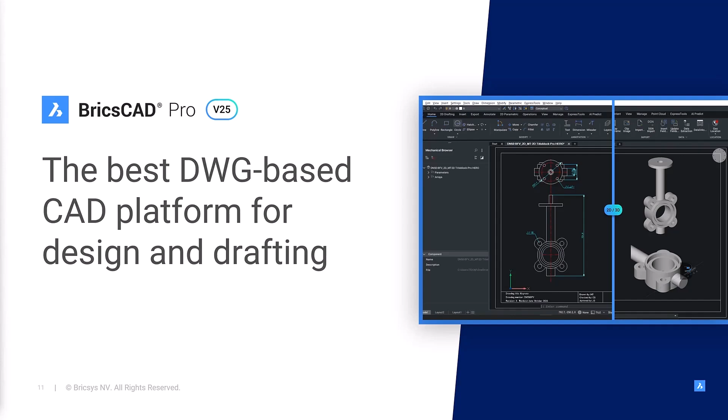We can say that BricsCAD V25 is the best DWG-based CAD platform for design and drafting. To prove this to you, we'll show you how we've enhanced your most common CAD workflows.

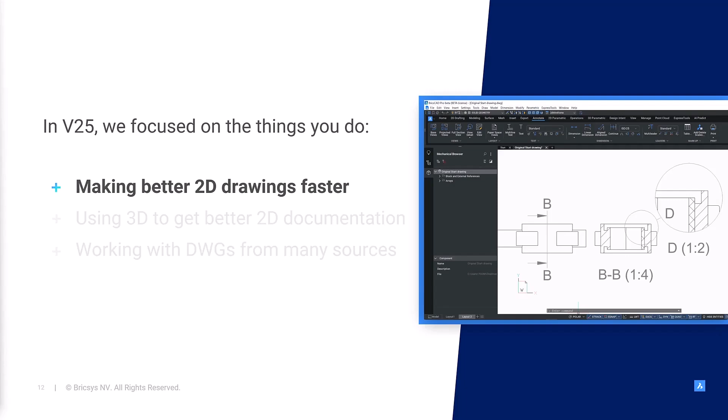First, we'll show you how BricsCAD helps drafters create better 2D drawings faster. Then, we'll show you how you can use 3D to get better 2D documentation and make the drawing look exactly like the part easily.

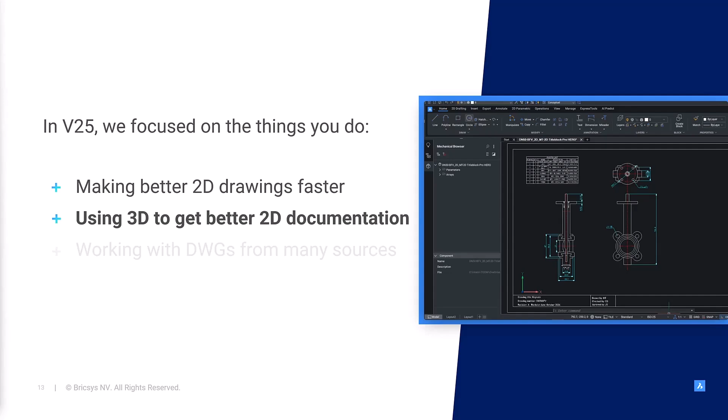Finally, we'll show you how BricsCAD helps you work better with drawings that come from outside sources.

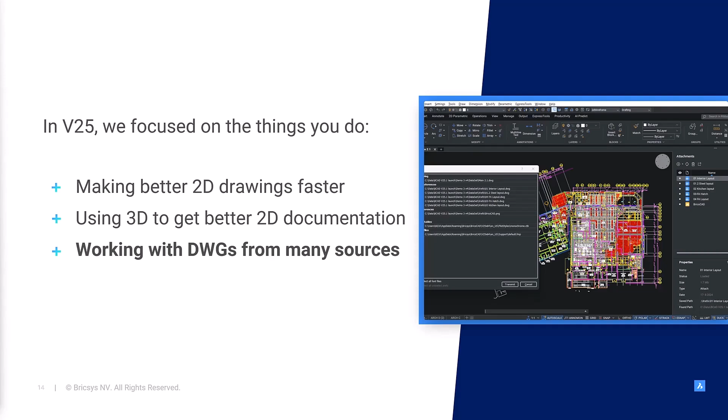First, we know that nearly 80% of our users do 2D drafting every day. We know this because whether you're building a building, producing a part, or putting together a complex assembly, a 2D drawing tells you how to do it.

So we focus on improving the tools you use to create accurate 2D geometry and annotations to get drawings created and published faster.

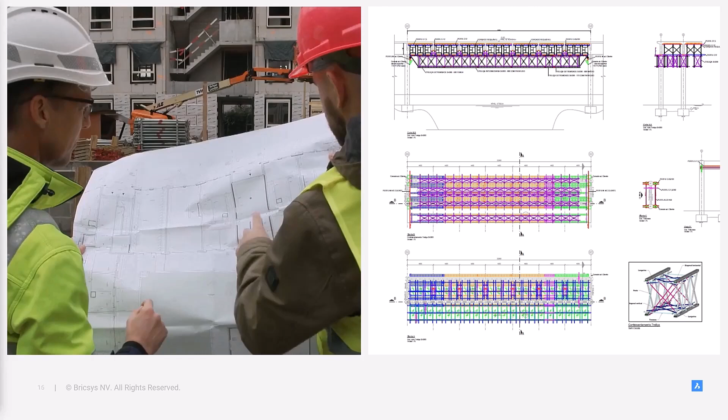In BricsCAD V25, we enhanced several commands and added some new ones to accelerate 2D drawing and document creation.

We improved a series of core commands to help you create and modify 2D geometry faster and more intuitively. Enhancements to trim, hatch, mirror, and scale, some of the most used commands in BricsCAD, will help you speed the creation of 2D geometry.

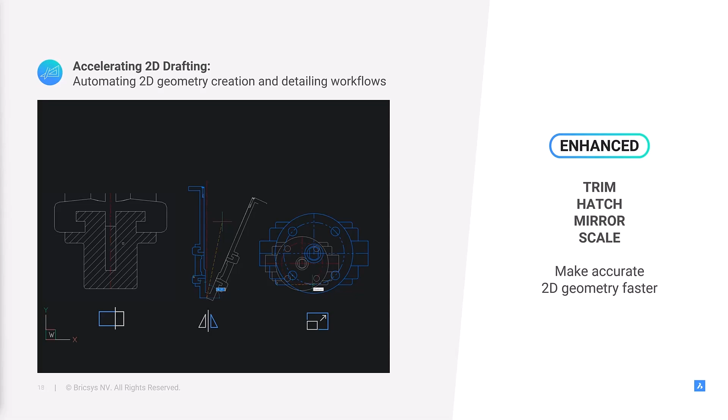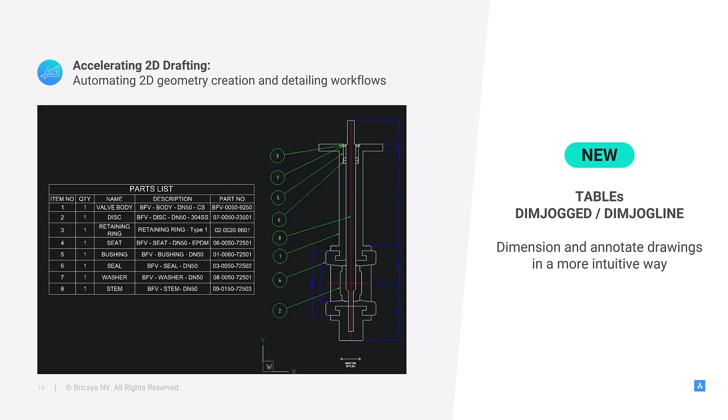In V25, we've added new functionality around table creation and editing, and added a much requested dimension type. Here's Mark Tooley, our Technical Marketing Manager for BricsCAD, to show you how these new features can help you work smarter. Mark, it's all yours.

Thanks, Don. In this demo, we'll focus on a series of core commands to help you create and modify 2D geometry faster and more intuitively.

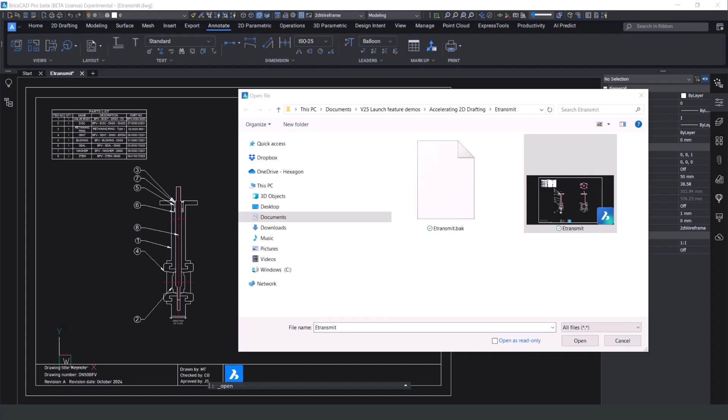You'll notice straight away in the File Open dialog box familiarity to every other Windows application, with the ability to search and pin commonly used file locations for quick access to your documents.

To demonstrate the enhanced features, we're going to use a cross-section of a butterfly valve with some pre-drawn geometry.

The trim operations have been vastly improved, and they work in an easy-to-predict way, offering productivity gains for fast geometry trimming with better boundary detection. This gives you, the CAD user, much more accuracy when trimming across multiple boundaries.

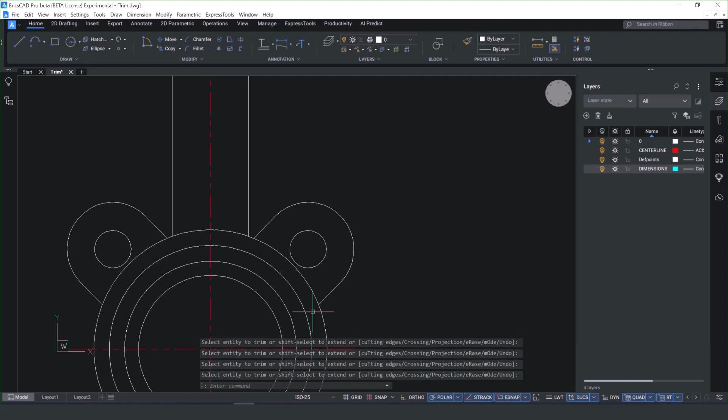Trim enhancements have also been added to when working across hatch regions, making it very quick to pick up closed boundaries, which enables really fast 2D edits.

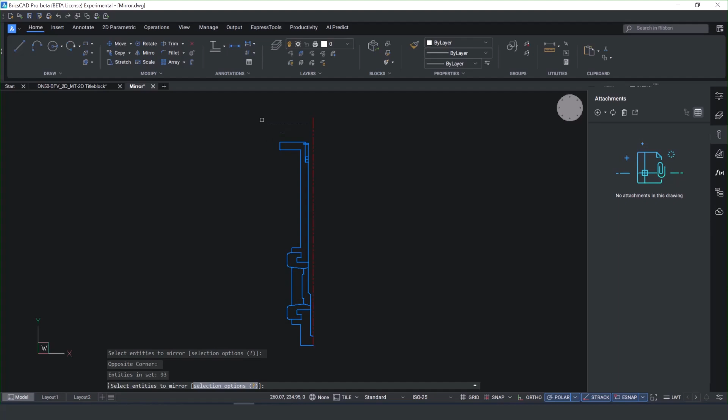The mirror tool now retains the temporary tracker graphics that makes the command much more predictable and more intuitive. This is great and offers parity for those that have migrated from another 2D CAD platform.

Improvements have been made to the scale command, making it much more controllable for the user. The preview window is visually more predictable when scaling entities visually inside the modelling environment.

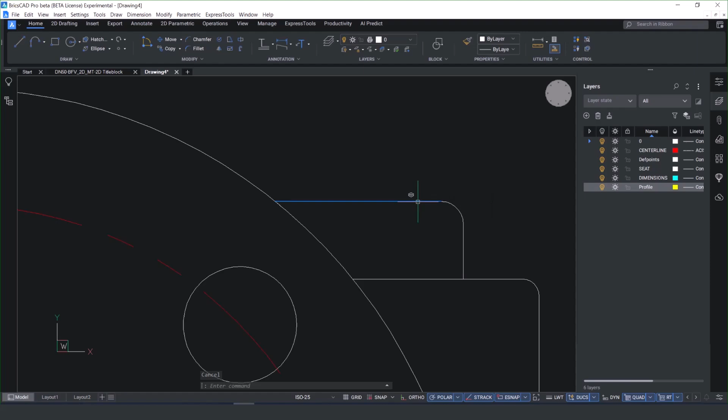Drawing fidelity has been addressed when working with imported data with overlapping entities. Selection cycling has been added to identify overlapping geometry quickly with imported data, and you've got the option to reassign the geometry to another layer or delete it.

As part of our continuous improvement, we're now going to look at the first of our annotation tools that have been enhanced. We've made some additions to the table command, but also new dimensioning tools for jogged dimensions and jogline dimensions, and we're going to use this standard slotted channel as our example.

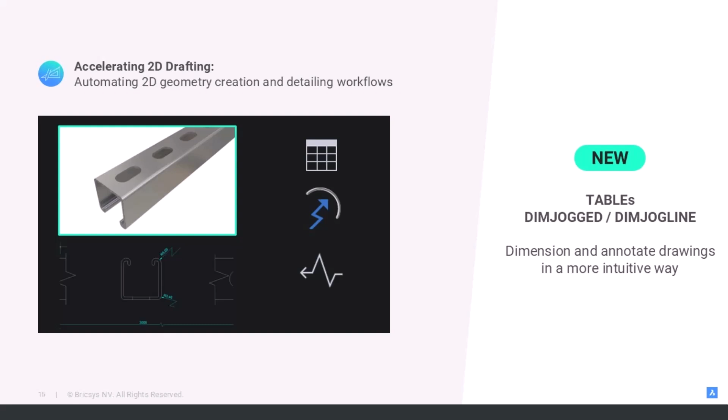The table functionality within BricsCAD has been vastly improved. You've now got the option to sequentially copy and paste data from one cell to another, making it really quick to duplicate data. You can just copy and paste from one cell to another as well.

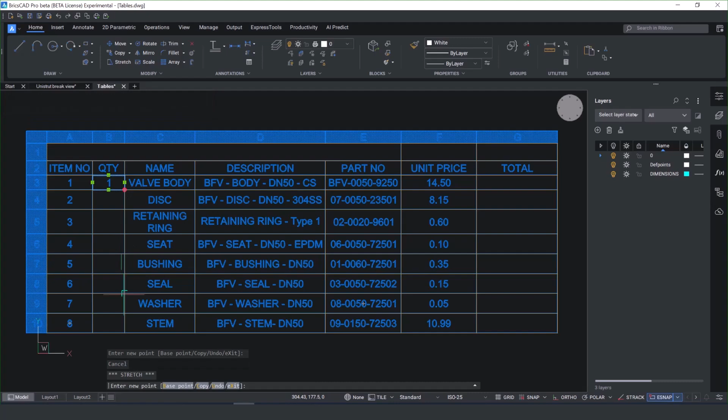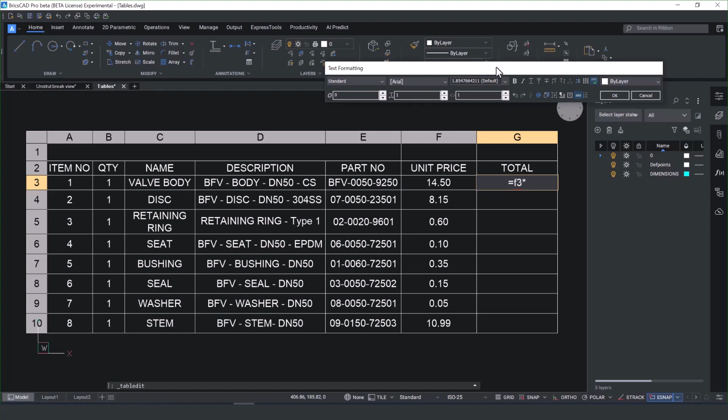The table-based functionality improvements don't stop there. You've also got the ability of copying formulas from one cell to another, making it really quick to total up values. For parity to other 2D CAD platforms and speed up your drafting practice, we've added 2 new dimension types directly from customer requests.

First of all is the jogged dimension that allows you to put a jogged leader line on a radial value.

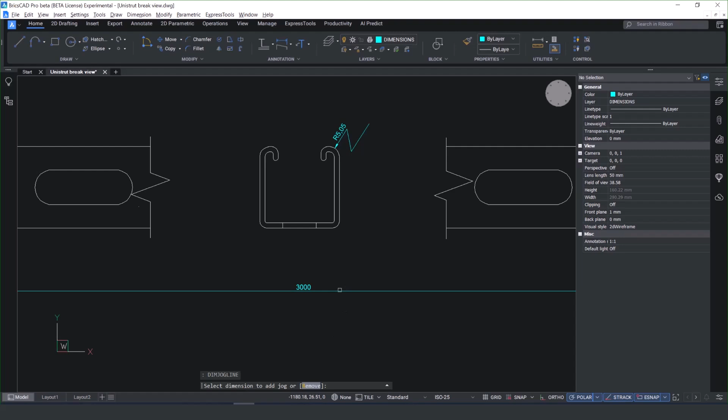You'll notice here I've got a cross-section of a standard slotted channel, and I've also got the option of adding a broken leader line on the dimension, making it a lot easier and quicker to detail the drawing.

BricsCAD is customer-driven CAD, and we know that about 15% of our users use 3D modeling frequently. What do these users know that 2D only users don't?

They have learned that 2D and 3D workflows come together seamlessly in BricsCAD Pro. They have also learned that even basic 3D modeling can help to make the drawing look exactly like the finished part easily. Why is this so important?

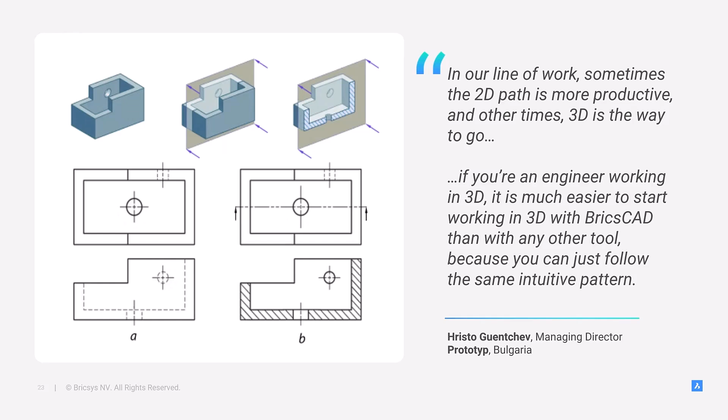It's important because an accurate representation of the design helps ensure that it will be built or manufactured correctly the first time. When 2D line work is automatically generated from a 3D model, section views can improve visualization of the design, reveal interior features of parts, and facilitate dimensioning of the drawing.

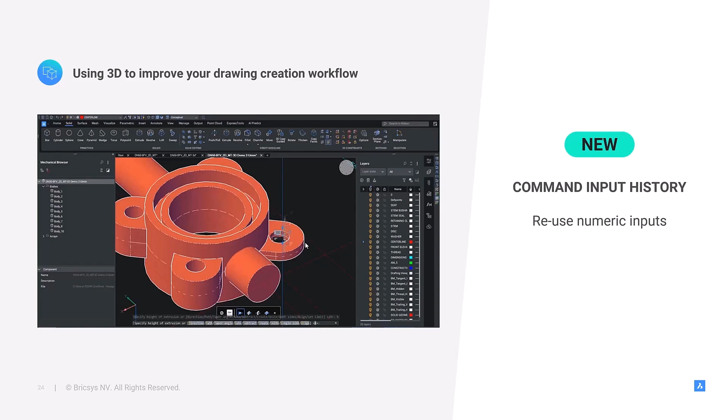To make it simple to take what you know about 2D and turn it into 3D, we've added a series of new and improved commands to BricsCAD V25. Command input history lets you type a value once and use it many times. And we've improved the performance of our core modeling engine to make the creation of 3D features faster.

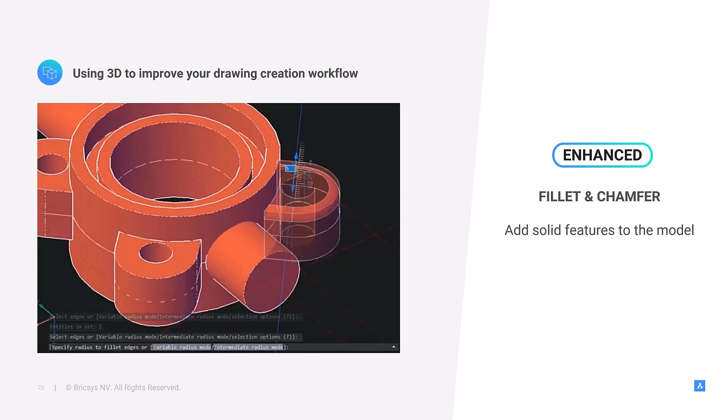We've enhanced the ViewBase command in BricsCAD V25, moving view generation to the background to let users continue to work while views are generated. And if your workflow includes the creation of 2D drawing views in model space, the flat-shot command runs up to 16 times faster than it did in previous versions of BricsCAD.

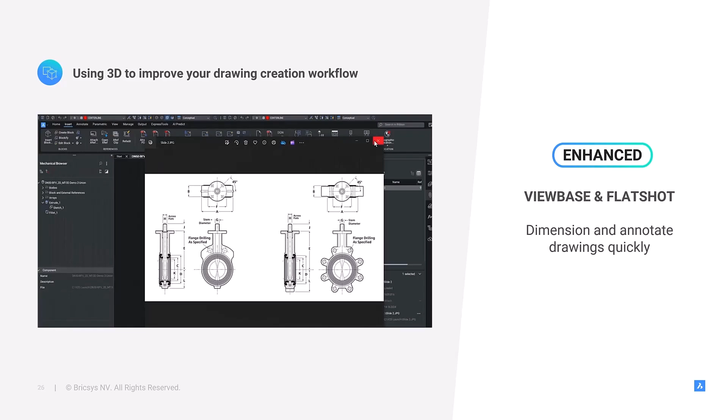Mark, please take us through BricsCAD's 2D to 3D to 2D workflow. Thanks, Don. In this demo, we will be focusing on a series of core 3D modeling commands within BricsCAD. This workflow combines the use of existing 2D profiles to create accurate 3D component representations.

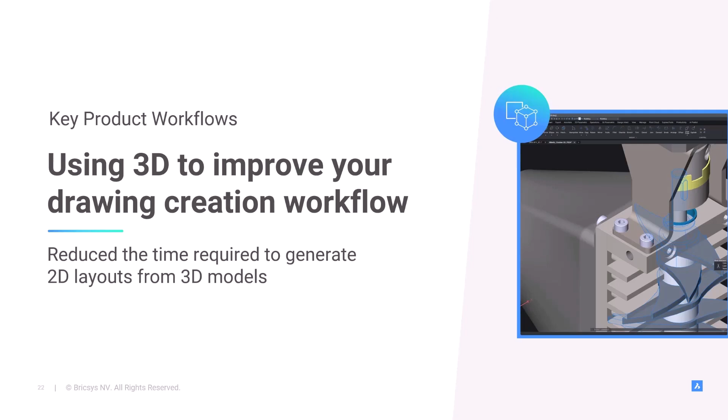Right, you guys have done the hard work in 2D. Let's look at how we can use the 3D capabilities of BricsCAD Pro to create better 2D documentation, whether it's an imported DWG file from a third party or created with native BricsCAD data.

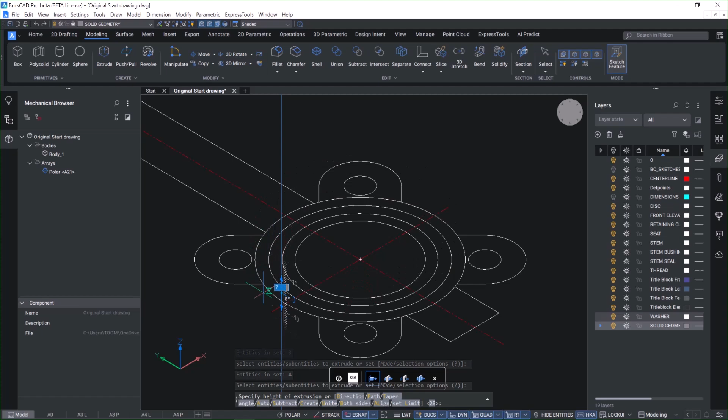Creating 3D geometry is fast. Using the enhanced quad shortcuts, you can access the 3D commands really quickly. And you'll notice by having boundary selection highlighted, we can pick closed regions to extrude into solid features. You've also got various end conditions when you're in the command.

You can set B to allow you to extrude the data both sides of the midplane, and you can also taper the value as well. So it's really quick to lay down 3D geometry in the modeling space.

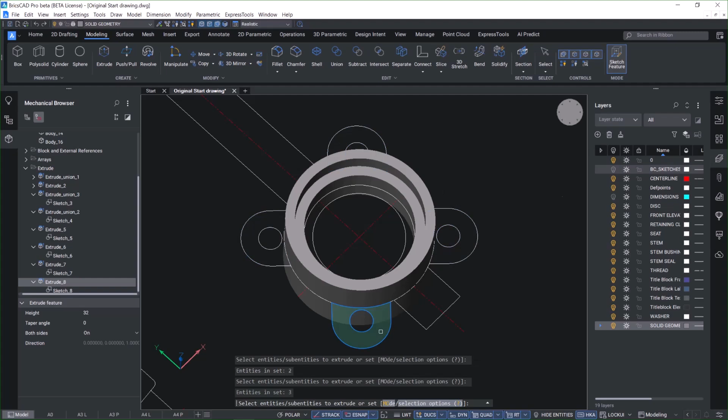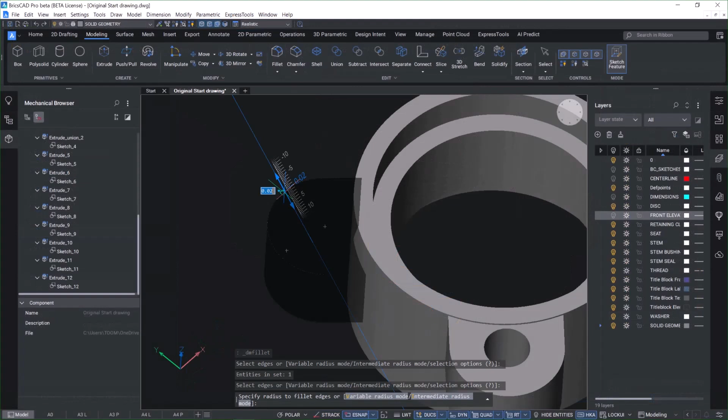To work smarter, in V25, you can use multiple closed regions to create a single feature. You'll notice here these 4 tabs have been created in a single command. But the great thing is you get downstream benefits because they're all seen as individual bodies, which can be manipulated independently. You'll notice in the browser I can change the value, and then I can also add fillets and chamfers at a later date. And when you change the value on screen, it instantly updates to give you a preview of what's happening.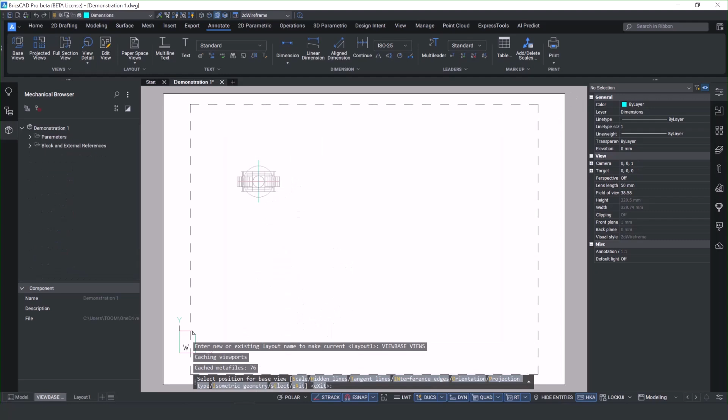You might hear us say the fastest way to 2D is 3D. So now we've got this solid model, we can use the newly enhanced VIEWBASE command, which works in the background to generate the views. And the cool thing is with this, in the 2D environment, you can create projected views really quickly. The downstream benefit is once you've got the drawing views in the 2D space, we can actually start looking at interrogating the model in a lot more detail to learn more about the design intent.

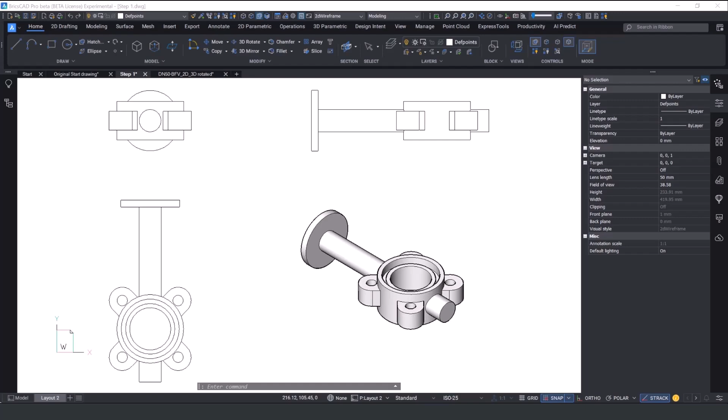Under the Annotate tab, we've got multiple options for view creation, such as sectional views, where we can actually take a cutaway through the model, and it just makes it so much easier to see and visualize any hidden detail. We can change the scale of the view, and we've also got circular and square detail views that we can create to really interrogate model details.

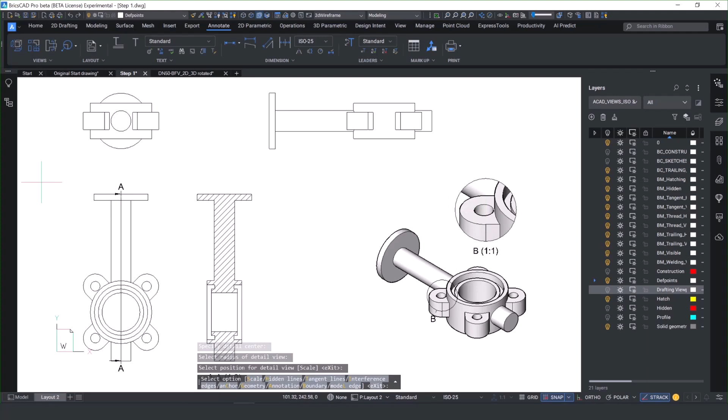The performance of the flatshot command has been vastly improved in V25. Within the model space, you can create 2D projections that can be saved as a block within the existing document or exported out as a separate file.

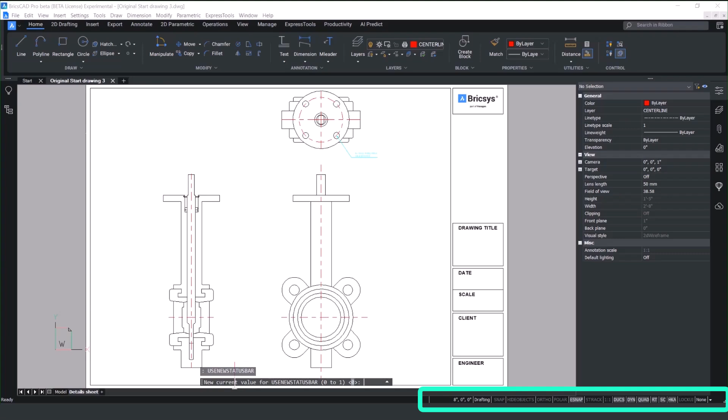We appreciate you're still going to be working within the viewports, and that's why we've enhanced the status bar. To use the new status bar, simply run USENEWSTATUSBAR on the command prompt and set the value from 0 to 1. Once you've restarted BricsCAD, you're good to go. This makes it really quick to change the viewport scale rather than having to go into the viewport properties.

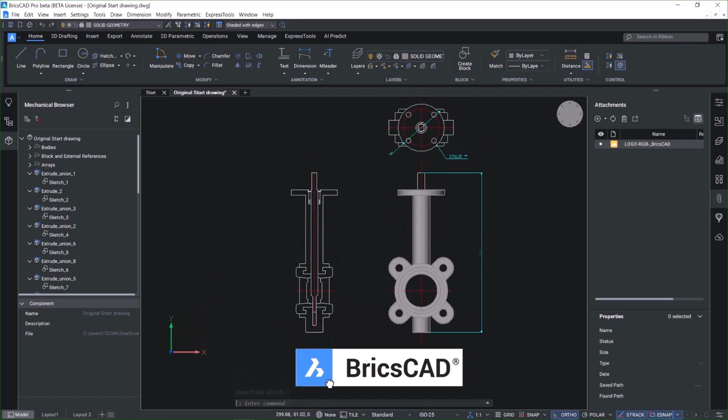When working with external references, it's really frustrating if the file path gets changed, meaning that the file can't be located. In BricsCAD V25, we've improved this, enabling you to run an extended search to find any of the missing items really quickly.

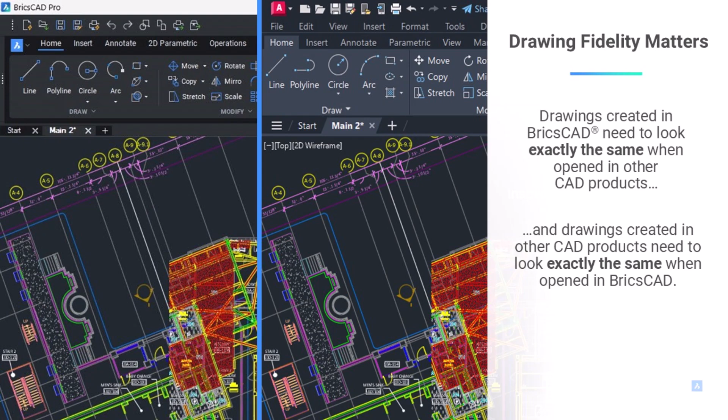Because BricsCAD is customer-driven CAD, we know that 100% of our customers work with DWG files from multiple sources, and that these files are created by multiple CAD products. Our customers tell us that drawing fidelity matters. BricsCAD displays the highest fidelity with the drawing file standard, regardless of where those files come from. And in BricsCAD V25, we've delivered updated tools that make it easy to ensure that both incoming and outgoing drawing files are optimized and highly performant.

Our customers tell us that drawing fidelity matters, so we've made drawing fidelity job one. BricsCAD V25 delivers new, smart tools that make it easy for users to ensure incoming drawing file completeness and integrity.

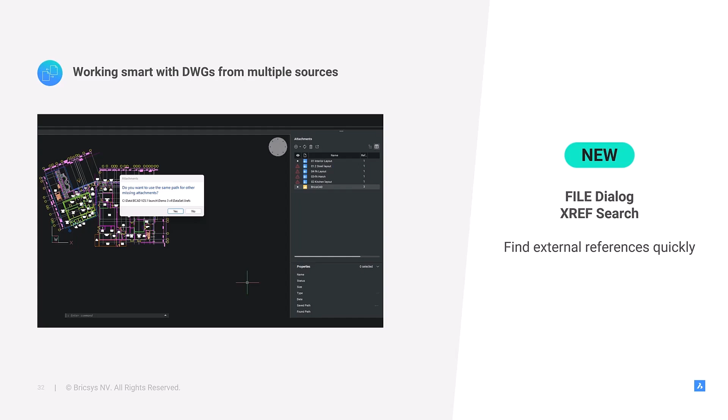A new file dialog and enhanced XREF search help ensure easy access and drawing completeness. And we've updated BricsCAD's unique drawing health workflow in V25 to help you automatically inspect and improve the performance of incoming drawings. The demo will show you how important drawing health is to the performance of your CAD product and the accuracy of the drawings that you create.

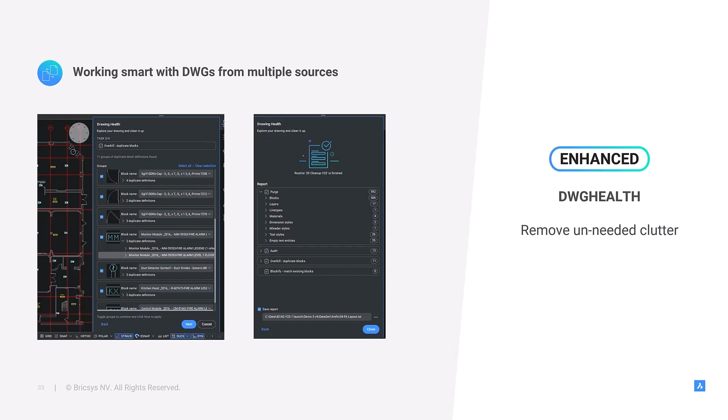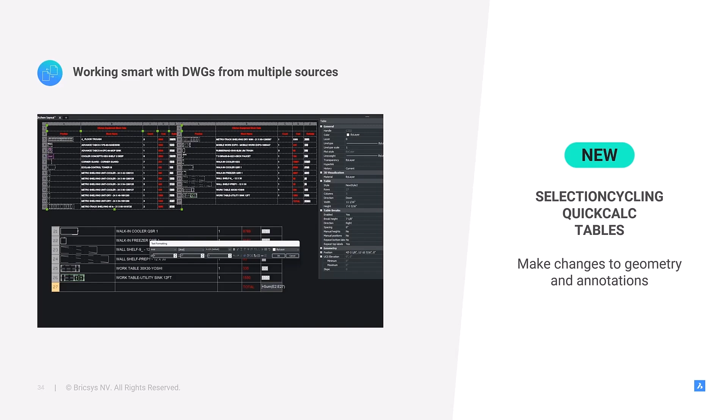We'll also show you some of the most requested enhancements to BricsCAD's drawing editing capabilities, like selection cycling, enhancements to Quick Calc, and the new table creation and editing functionality. And finally, we'll demonstrate BricsCAD's powerful sheet set management and publishing workflows.

Our North American Presales Technical Manager, Julie Kavarian, will show us what's new in BricsCAD V25 to help you work smart with drawings from everywhere and anywhere. Julie, take it away.

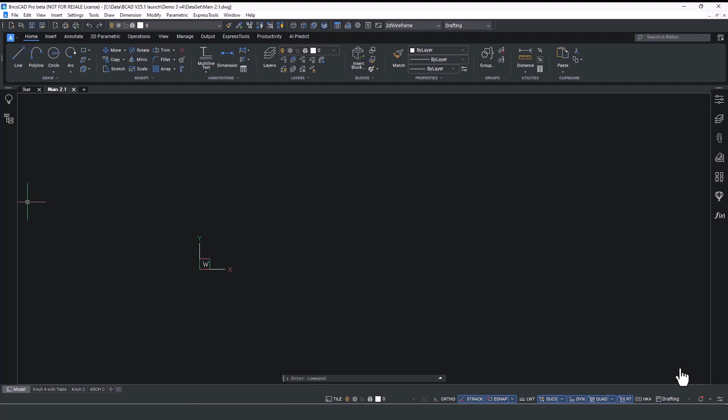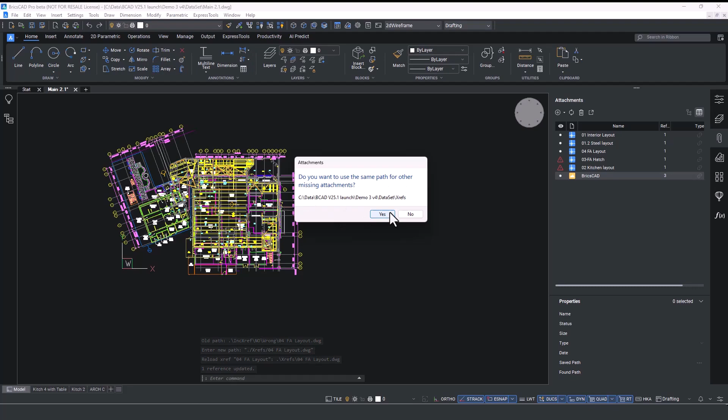Thank you, Don. Is there anything more annoying than opening a drawing and seeing that dreaded missing files pop-up window and those red triangles that mean the XREFs aren't found? BricsCAD V25 delivers enhanced XREF searching for those wayward paths. Let BricsCAD try to find the correct path by running an extended search, or locate a drawing and let BricsCAD apply that same path for the other missing attachments.

When receiving drawings from external sources, we never quite know what to expect. Here is a small fire alarm layout drawing. Right away, we can see that those fire alarm symbols are no longer blocks. So I wonder what else needs to be fixed, and how do I know what needs to be fixed in a drawing that I'm not familiar with?

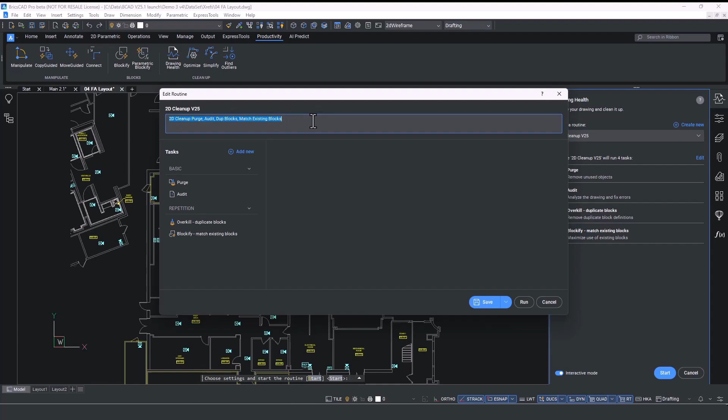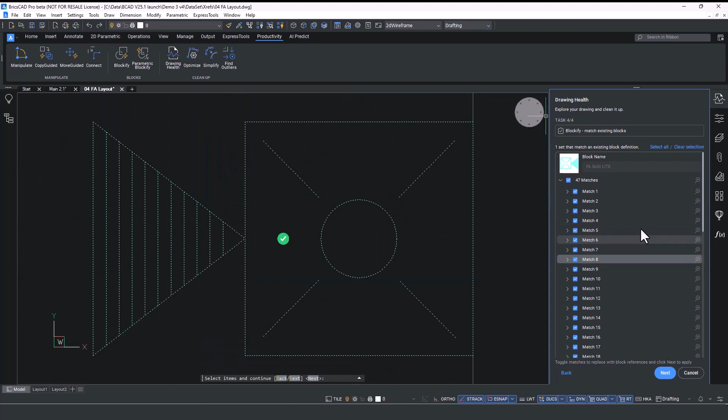Let's find out with our unique drawing health workflow. In V25, we've added descriptions to the routines to indicate their potential impact on drawings. And there's an updated command panel that offers increased interaction. Here, you can zoom into those entities, enabling you to make smarter decisions while drawing health is running, whether it's determining which duplicate block to delete or what geometry to convert to a block.

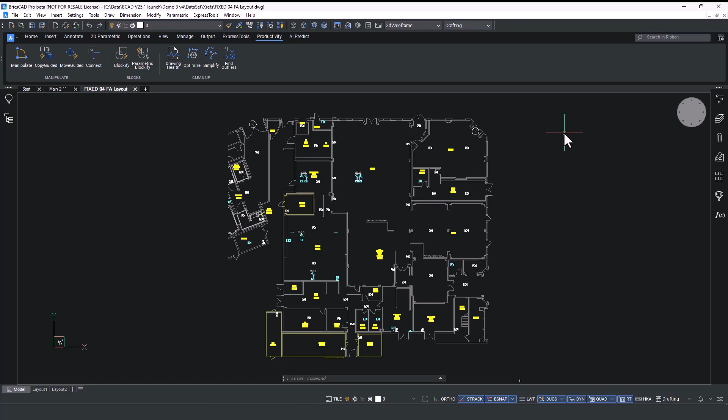After this routine, this particular file was reduced by about 75% in size, and the number of blocks was reduced from over 600 to 83. And that's important because a healthy drawing not only saves you time, but also storage space.

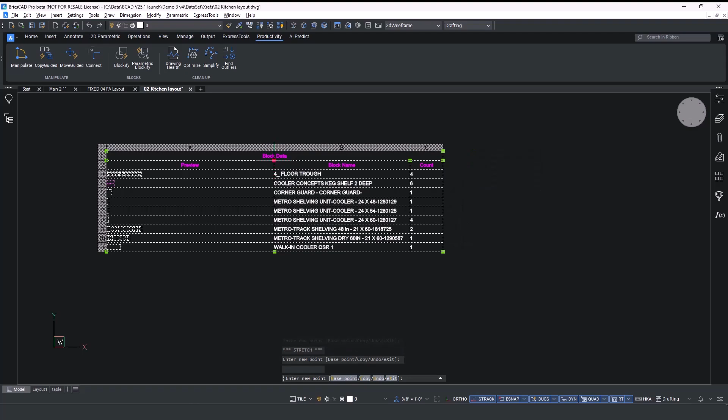Now, here is another drawing from a kitchen consultant that has the equipment layout. Each piece of equipment is represented by a block. We need to count the blocks, generate a table, and add pricing information to the table. Several ways we can do that. Here, I used an AutoList routine that automated the process and creates a fully editable table.

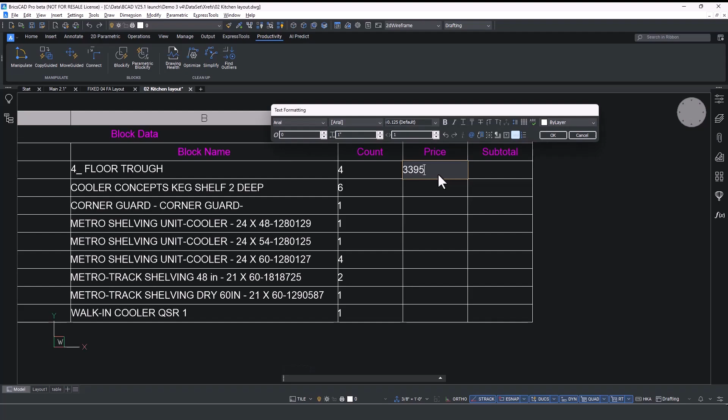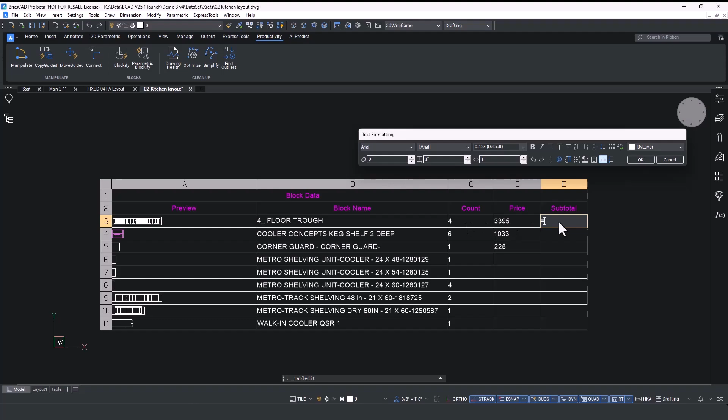BricsCAD V25 continues to enhance functionality around table creation and editing. It now supports Excel-like formulas for, say, subtotals or totals. And these formulas can be easily copied from cell to cell, just as you would expect. Here are those formula updates based on the cells.

We've made BricsCAD V25 even more familiar by adding viewport standard scale and annotation scale fields to the new status bar. Now the annotation scale is also saved with your model space views, ensuring you always know the scale at which the view was created.

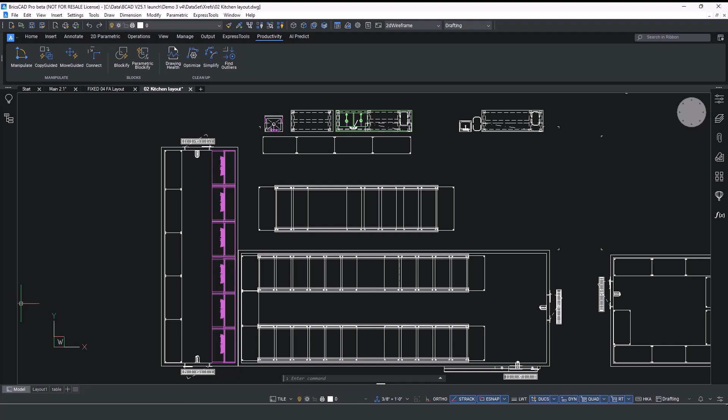Adding the viewport scale controls to the status bar allows the layout scale to be simply set. Or you could also add the viewport scale to your rollover tips for another quick way of editing.

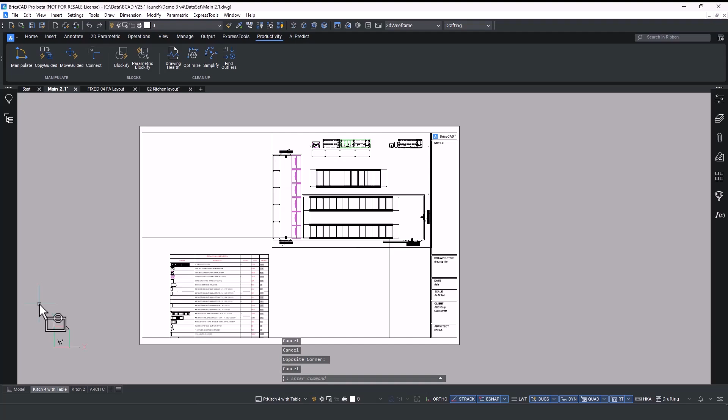Remember the table with the kitchen equipment blocks? Well, now it's easy to create the needed table breaks to fit the paper space viewport and also customize the display of the table, from spacing options to repeating the top or bottom labels.

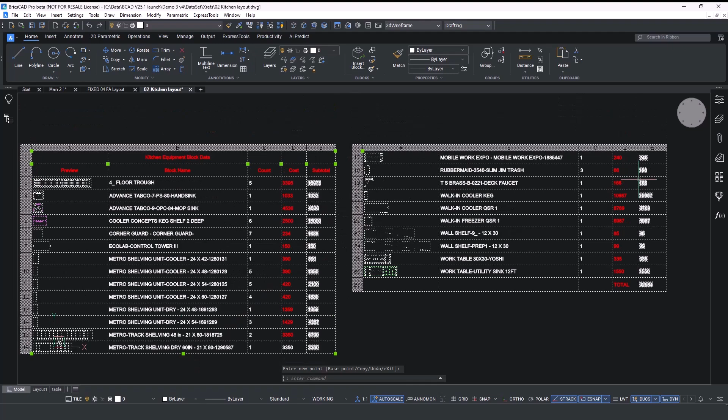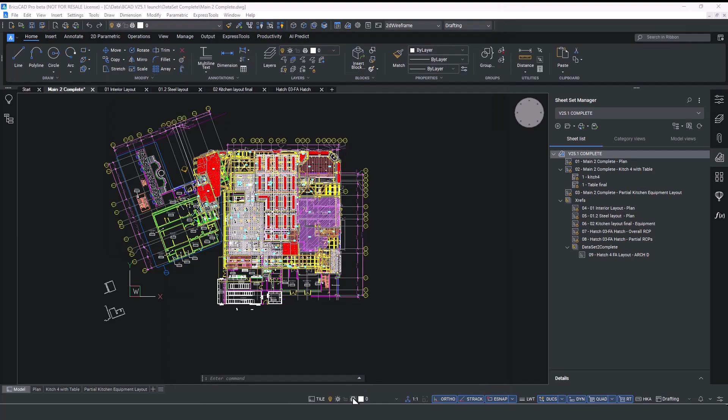When it's time to share your drawings with other teammates, use eTransmit. It now includes choices to bind or insert your XREFs, and this is available here through the Sheet Set Manager or through the Drawing Explorer.

BricsCAD continues to offer easy and familiar options for publishing through the Sheet Set Manager, Publish, or Layout Manager. You decide which option works best for you. Back to you, Don.

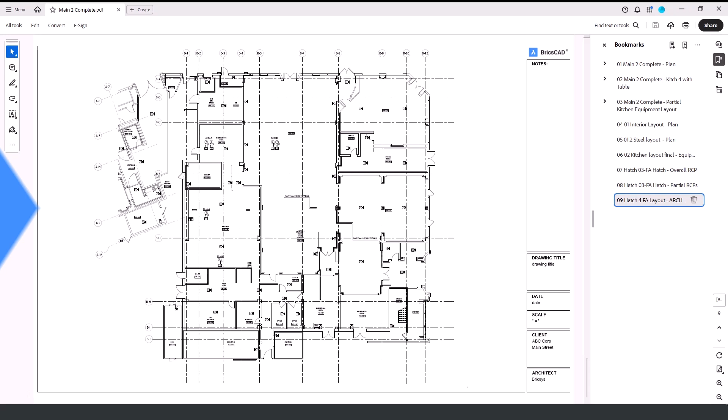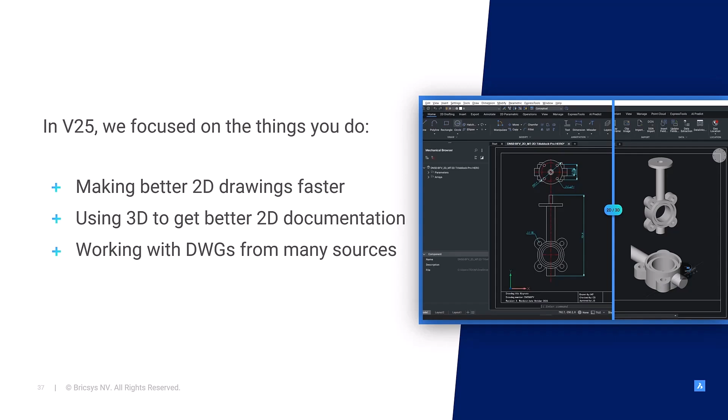So, why do we say that BricsCAD is the best DWG-based CAD software for design and drafting? Well, first we showed you how BricsCAD helps drafters create better 2D drawings faster. Then, we showed you how you can use 3D to get better 2D documentation and make the drawing look exactly like the part, easily. Finally, we showed you how BricsCAD helps you work better with drawings that come from outside sources.